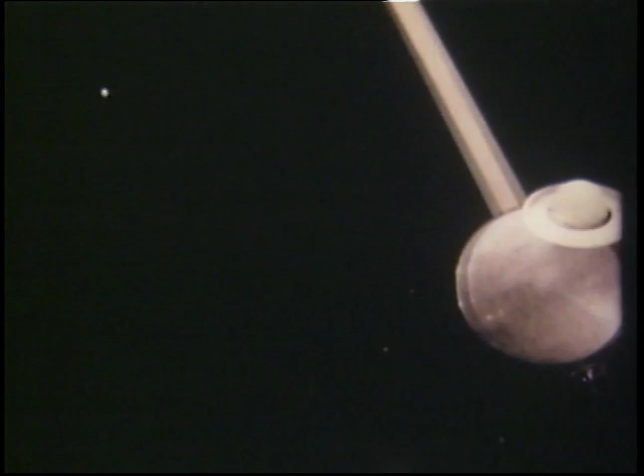Time, intangible, elusive time, measured in years by the broad movement of planets, measured in seconds by the inventions of man.

Seconds, tiny fragments of time, marching single file down through the ages, writing the pages of history as they pass in review. 60 seconds every minute, 3,600 seconds every hour,

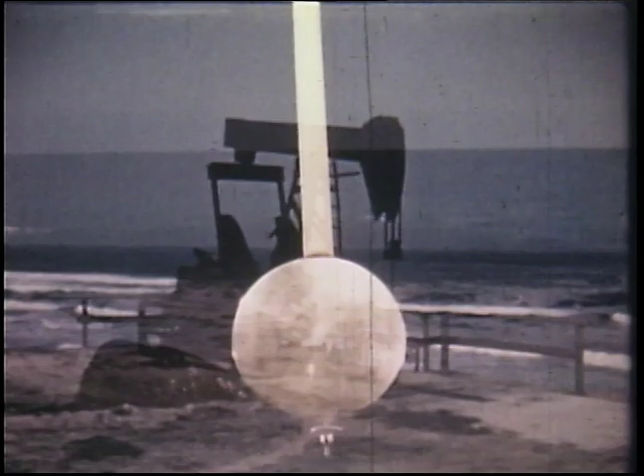86,400 seconds every day. And with the fleeting life of each and every second, more than 6,000 gallons of oil are brought up from the earth.

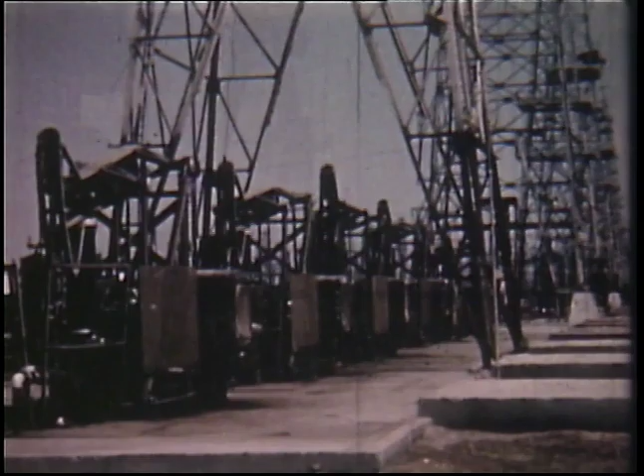Oil from the east, oil from the west, the north, and the south, oil from 30 states of the USA, and from 50 countries of the world. Oil coming from the earth in huge quantities to fill our increasing demand.

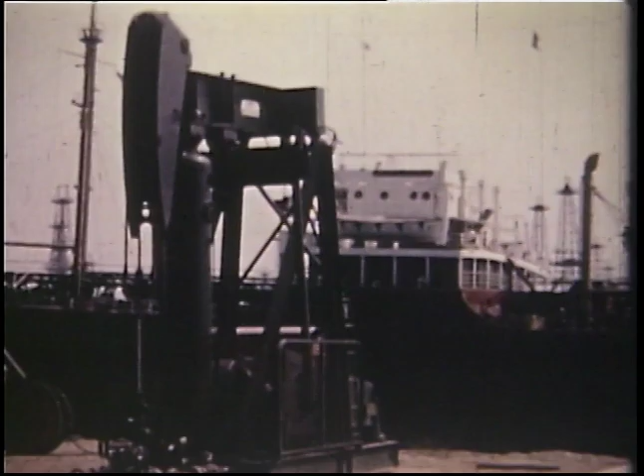In the United States alone, enough oil is produced daily to float a giant ocean vessel. And that's a job calling for a lot of manpower.

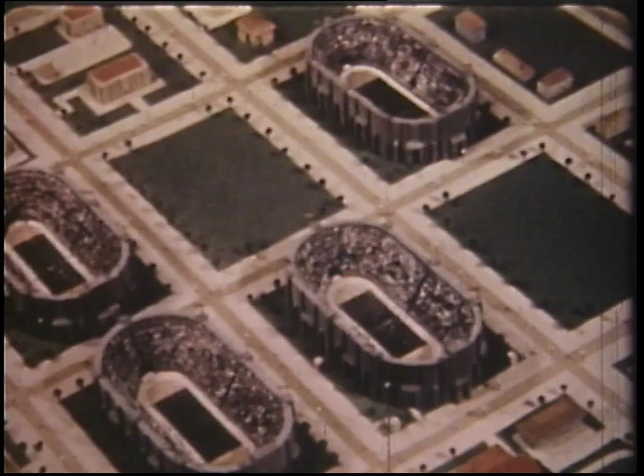For example, a famous football stadium seats over 100,000 persons. Yet 20 stadiums of this size can be filled to capacity by the number of persons steadily employed in the oil industry.

Many men, many jobs, and all because less than 100 years ago, someone had an idea. An idea that perhaps a man could find oil in huge quantities by boring a hole into the earth.

The idea of drilling specifically for oil was new, but the principle employed was an old one. Almost 3,000 years ago, the ancient Chinese had developed a laborious method of drilling for salt.

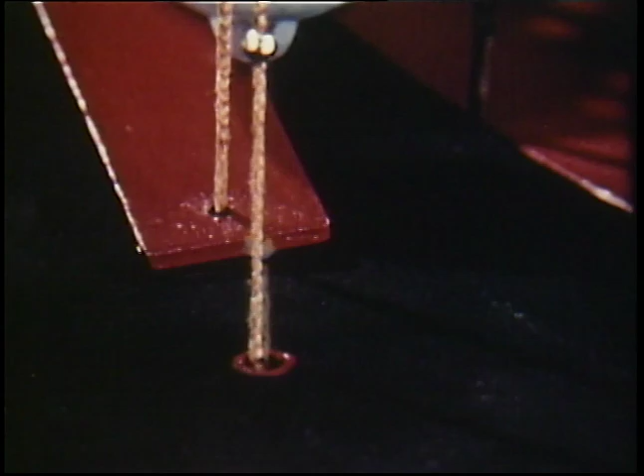The well drillers would jump on a springboard, something like a diving board. This would give slack to the rope supporting the drill tool, causing the tool to drop and pound into the earth.

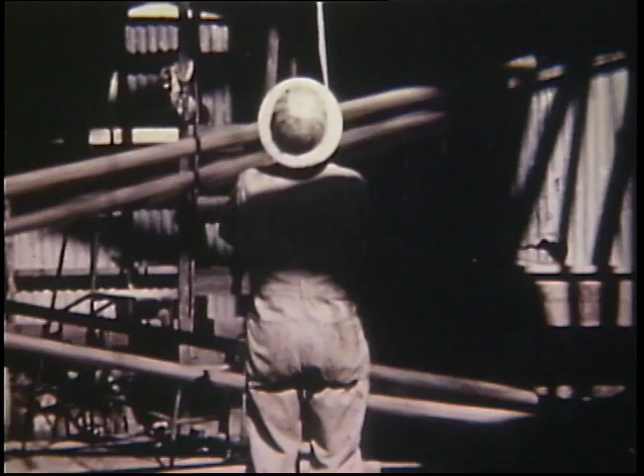Out of this principle evolved the early method of drilling for oil, cable tool drilling, in which a walking beam took over the job of lifting and dropping the drill tool to pound a hole.

Now, there are two common ways of forming a hole. One way is to pound or punch out a hole, as in cable tool drilling. The other way is to bore or scrape out a hole, and that's the idea behind modern rotary drilling.

Using rotary drilling methods, the search for oil has gone to almost unbelievable depth. The famed Empire State Building towers more than a quarter of a mile above the streets of New York. Yet its colossal height could be sunk into the depths of one of the world's deep oil wells.

And another such building, and another, and another, and yet another, until 15 Empire State Buildings have been sunk to approach the depths which have been reached by rotary drilling.

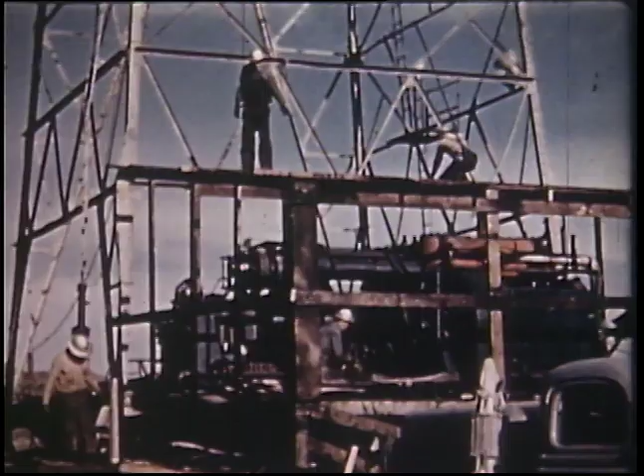Suppose we watch the big job of sinking a deep well by the rotary method. The work begins with the erection of the derrick and the installation of the rig.

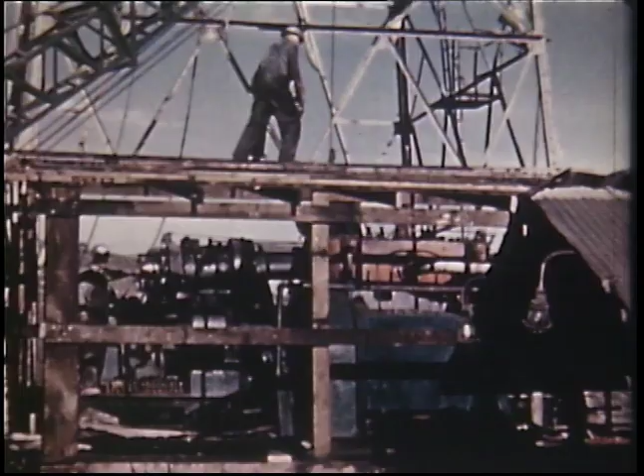This equipment may have cost up to $250,000, not to mention the $50,000 that may have been spent just getting into the well location. Before this exploratory well is completed, it may represent an investment of $1 million, and the chances of actually finding oil are about 1 in 9.

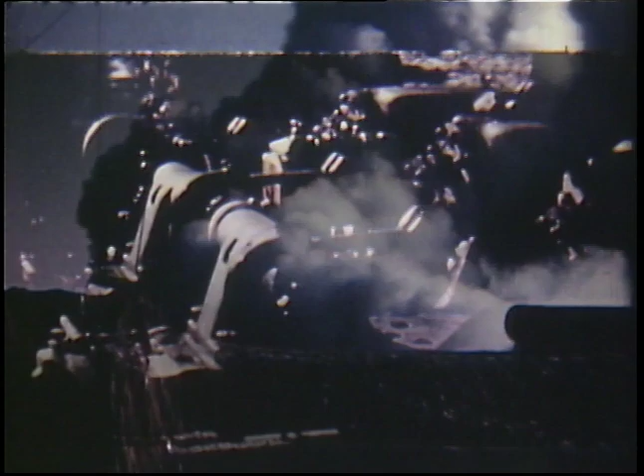With the derrick and rig installed, drilling operations get underway. We are making holes.

A heavy steel rotary table turns the drill string below ground. A square hollow pipe called the Kelly works off the rotary table and fitting through a square hole is free to move up or down.

Fitted to the Kelly is a length of drill pipe. More and more of these 30-foot sections are added as the well goes deeper. At the end of the drill pipe is a drill collar, and below this, the bit.

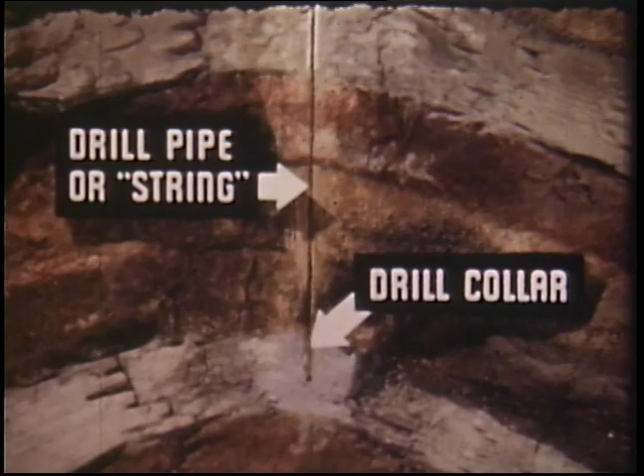There are more than 50 different types of bits. Here, a simple one is used to cut through the soft surface formation.

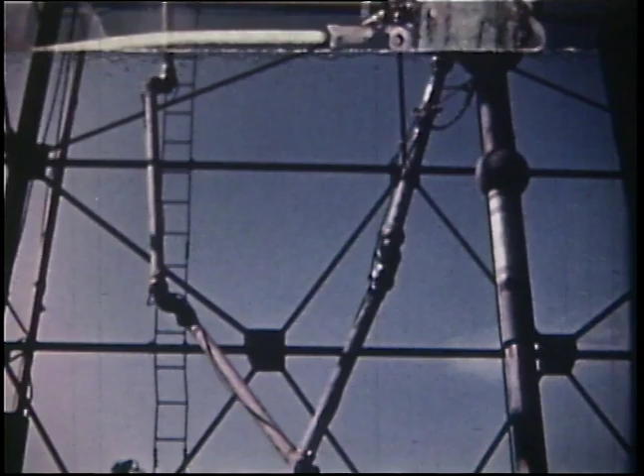Mud, scientifically treated mud, plays a highly important role in drilling operations. Circulated by a battery of powerful pumps, the mud is forced up into the swivel.

Surging down through the hollow pipe of the drill string, it jets out around the bit to perform vital cooling and lubricating action. Returning up outside the drill pipe, the mud seals the walls of the well. This helps maintain pressure and prevents the walls from caving in.

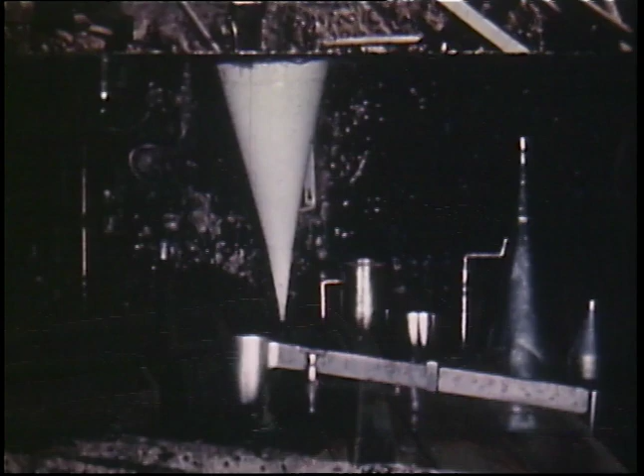In addition, the mud carries up the drill cuttings from the bottom of the well, providing important information about the strata which is being penetrated. This is mud with a college education. Special chemicals and weighting materials are added from time to time to maintain the formula in precise balance.

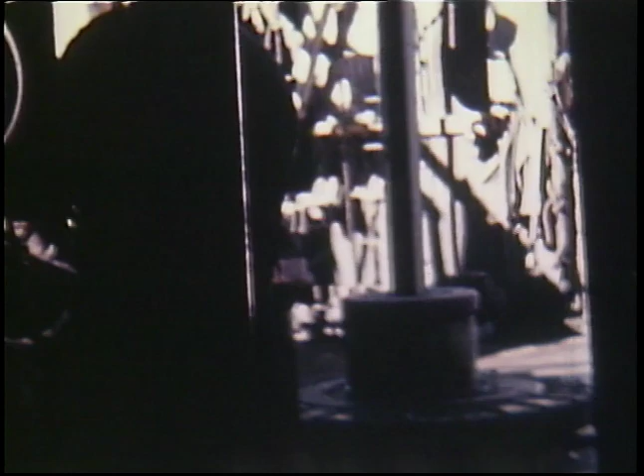As drilling progresses, various types of underground formations are encountered. Now we're getting into hard stuff. We'll have to exchange our bit for one designed to penetrate this harder formation. Let's pull her up.

This means pulling the string, a long job calling for precision teamwork between the members of the drilling crew and the ponderous equipment at their command.

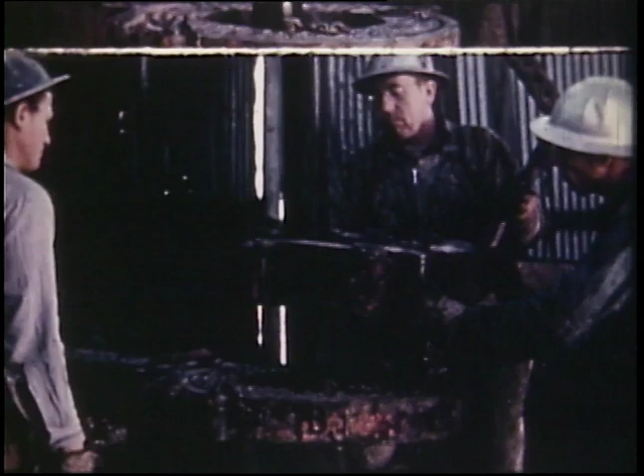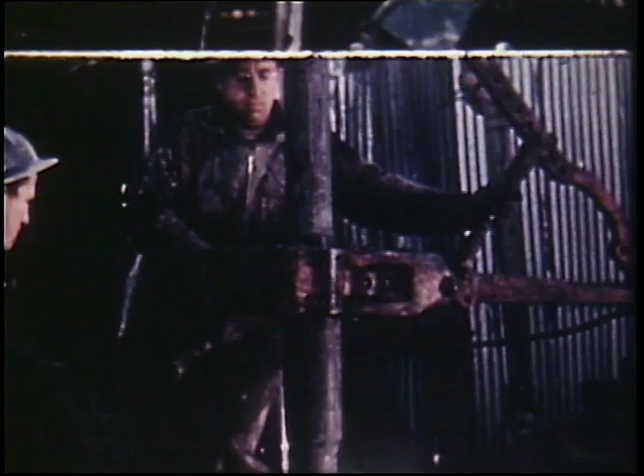Section by section, the huge pipe is hauled up, carefully disjointed and stacked. Five men working as one, handling tons of steel with a confidence born of long experience.

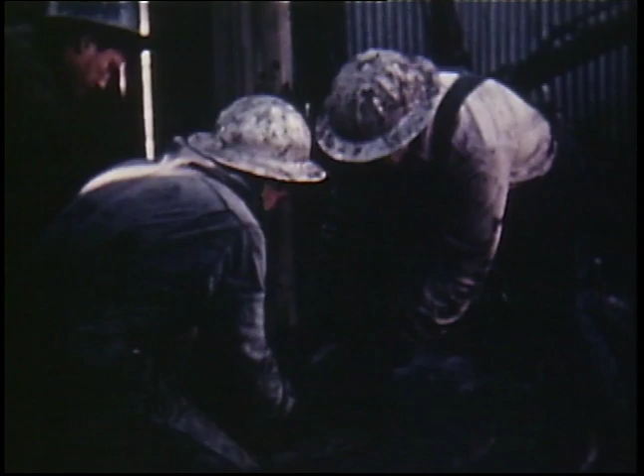And here's the new bit, designed for chewing through hard rock. This and many others will be worn out before the drilling is completed. After the new bit is in place, we'll have to recouple and lower the string again.

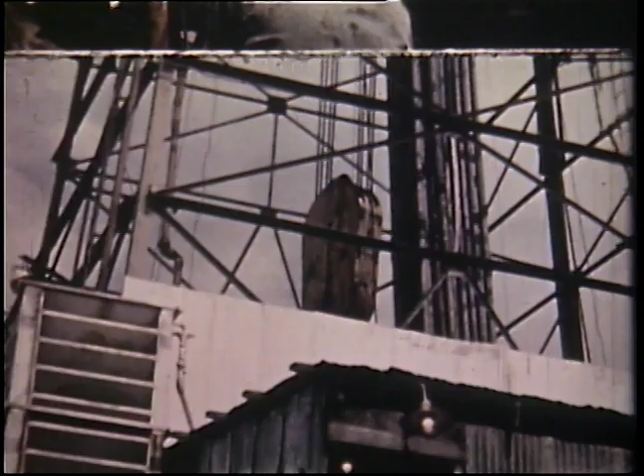With drilling underway once more, 3,000, 4,000, 5,000 feet down, the going gets tougher, slower. Hard rock and soft. Uh-oh, trouble.

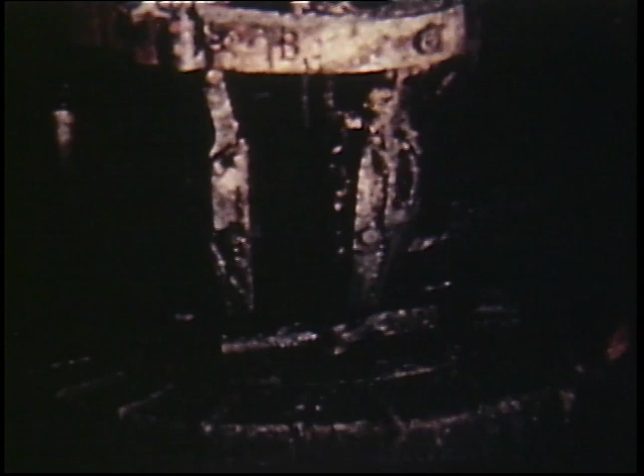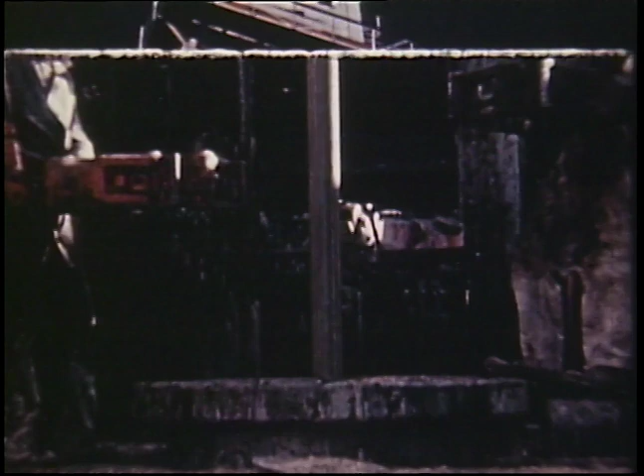Yes, real trouble. A broken drill string. We'll have to quit drilling for the time being and go fishing.

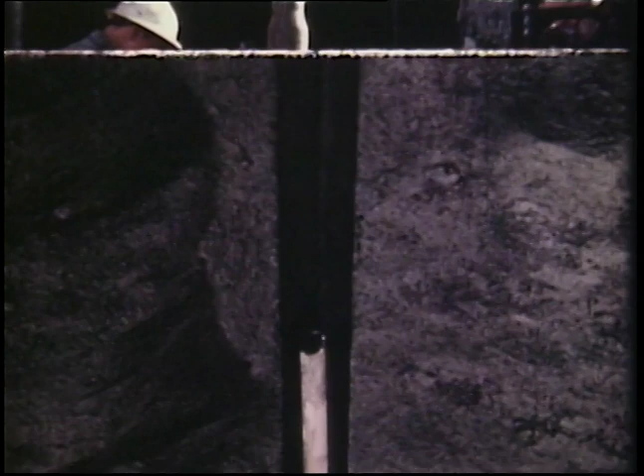An attempt must be made to bring up the twist-off, or fish, from its position thousands of feet below. And here's the fishing tackle, a socket designed to slip over the broken end of the drill string with dogs to clutch it. It is lowered into the well on the drill string.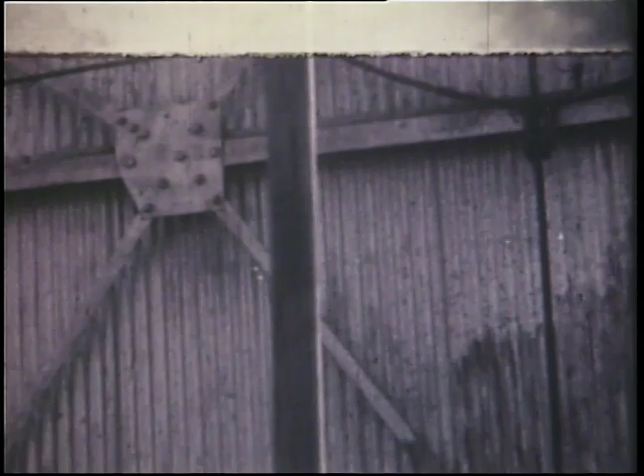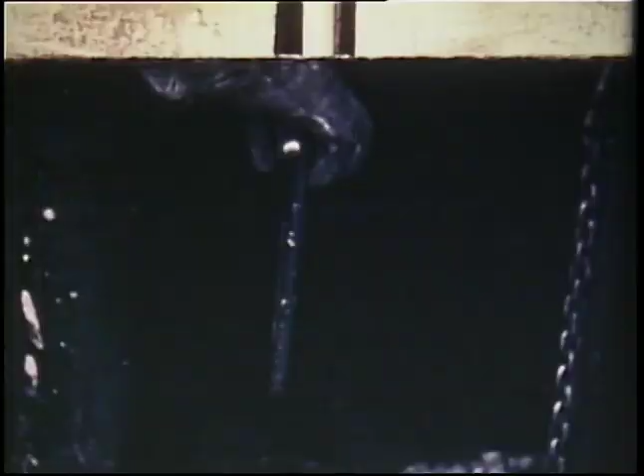The operation may take several days. Sometimes the fish refuses to be caught, even after every possible type of fishing tool has been used.

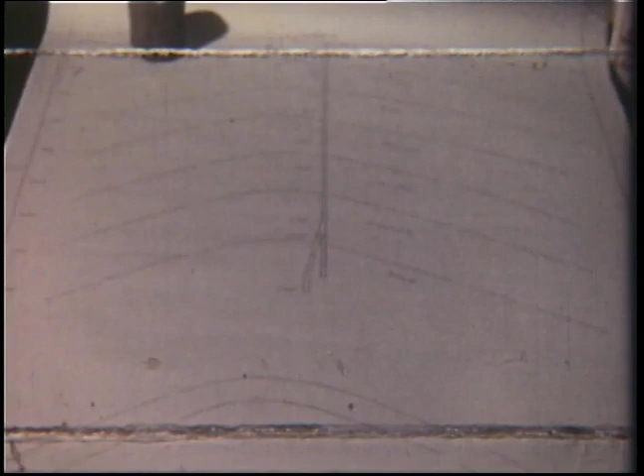With the fishing not making much headway, the engineers must decide whether to continue this costly operation, or to abandon the well, or to whipstock. The decision is whipstock. We'll try to go around the broken drill string by veering off from the straight hole.

Yes, now we're doing exactly that by directional drilling. With a whipstock, a beveled piece of steel shaped to deflect our bit over at the precise angle desired, we are accomplishing the seemingly impossible feat of drilling a curved hole.

We have angled our well over to bypass the broken string. And again, the drilling is continued, but now more cautiously than ever.

We're down past the 10,000-foot mark and nearing the spot that our scientists tell us should be productive formation. Rate of penetration has increased. Soft formation and maybe, well, we've got to get a sample of what we're hitting down there.

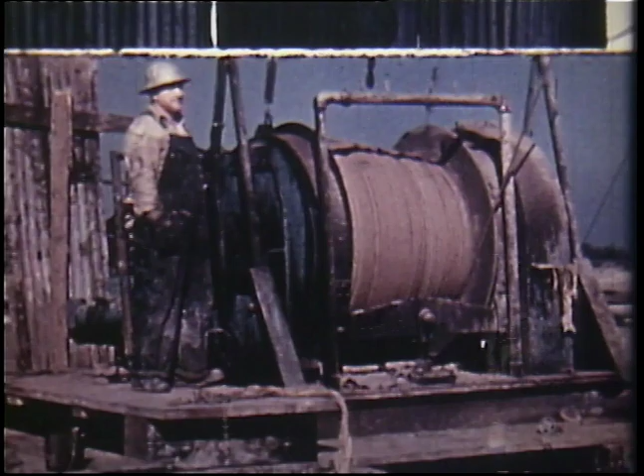A special core-taking barrel is lowered into the drill string by means of a cable and windlass. The core barrel, held firmly within the drill collar, works like Grandma's cookie cutter. It slices out the desired core sample, which is retained within the barrel and hauled back to the surface on the cable.

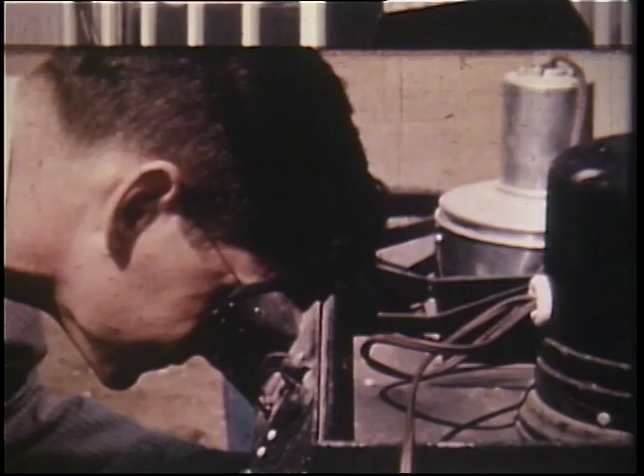A careful analysis proves our core to be essentially water-bearing, despite minor oil stains. Not good enough for production. Disappointing, but maybe a little farther down.

Another 300, 400 feet, and again, the speed of penetration picks up. This time, we'll use electric logging to see what we're getting into.

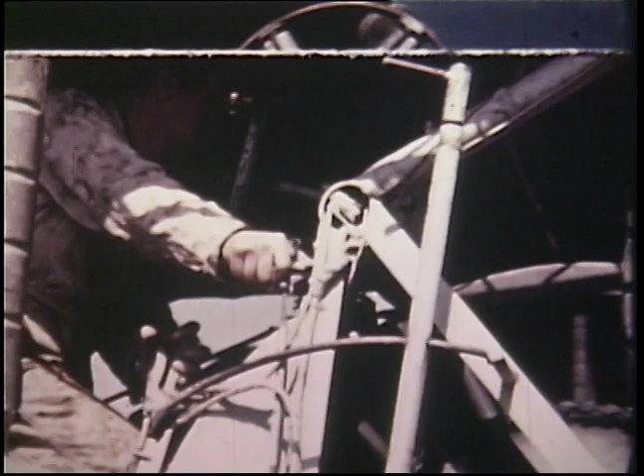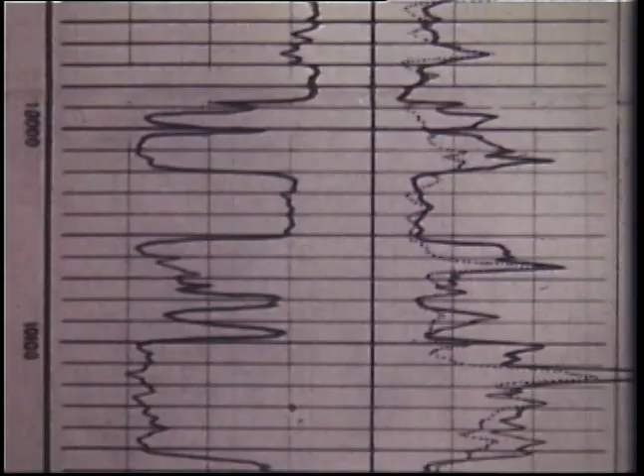This device consists of a group of electrical instruments which enable us to get an indication of the physical character and fluid content of the formation we have penetrated. The reading looks favorable. We'll case the formation off.

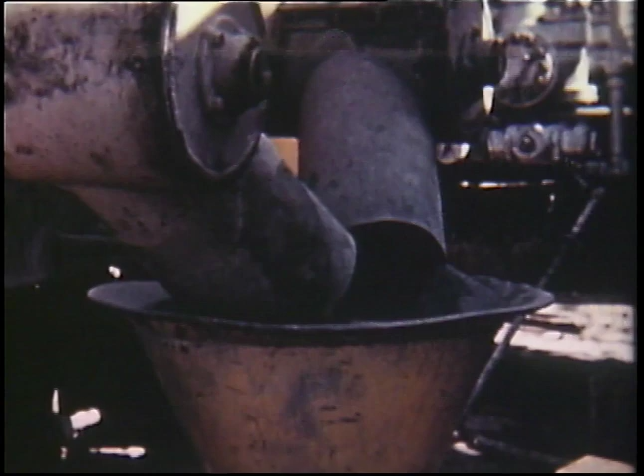A cementing outfit is called in. The cement is mixed on the spot and pumped to a special connection at the top of the casing. Forced down with mud, the cement rises between the casing and the wall of the well. The cement is allowed to harden.

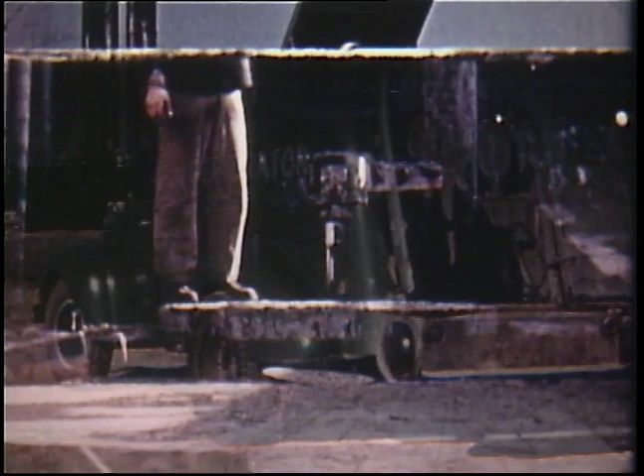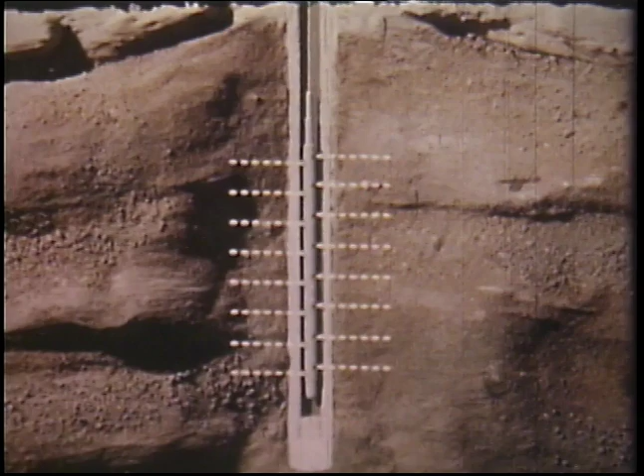And now we are ready to cut loose the heavy artillery. A gun perforator is lowered into the well. The device is fired. Heavy caliber bullets pierce the steel casing and cement to let in the oil.

Now tubing has been run into the well, and if she's going to produce, it'll come through that tubing. A Christmas tree has been added to control the expected flow.

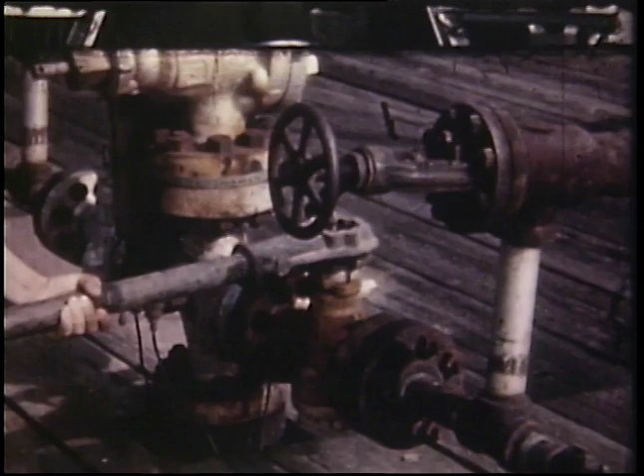Oil or water is forced through the tubing to flush out the mud. Only about 1 out of 9 exploratory wells is productive. A few tense seconds, and we'll know about the one we've been working on for so many weeks. It's now or never.

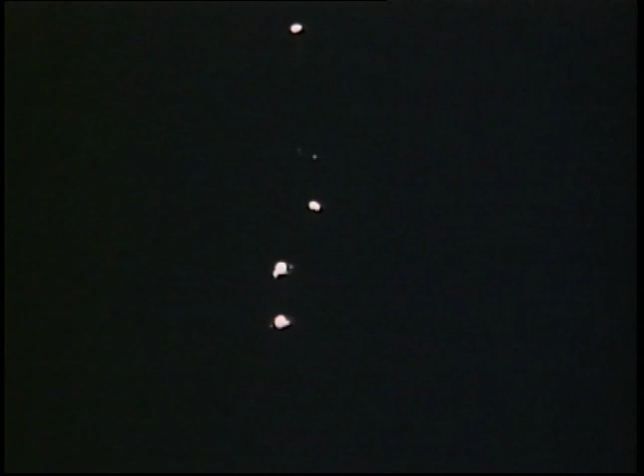Yes, it's the birth of an oil field. One more victory in the ceaseless night and day job of searching, drilling, bringing up from the earth new supplies of petroleum to fill the increasing demands of modern living.

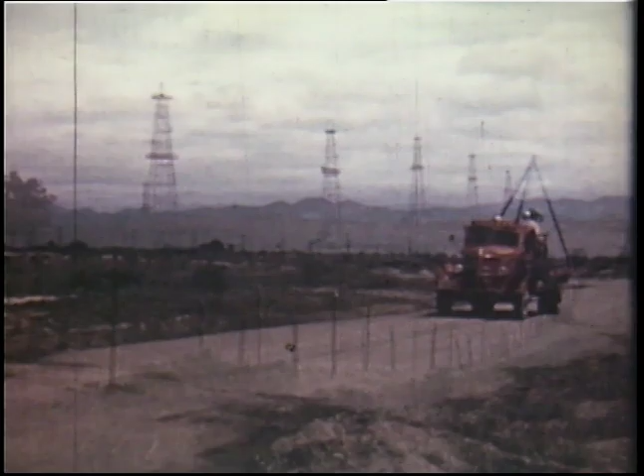We drilled a well and found some oil. Now begins the many-sided job of production, getting the oil out of the ground and into the refineries. To produce oil efficiently from this area, additional well locations must be scientifically plotted and drilled in. Roads must be built, equipment installed, oil storage and treatment facilities erected, pipelines laid - 1,001 tasks performed by men of almost every sort of skill and training.

Perhaps you'd like to meet one of these oil men, a production engineer. His job is conservation, getting the last possible oil from nature's reservoir and getting it efficiently.

Pardon me, Mr. Benson. Mind if we ask you a question? Why, certainly not, but keep it simple, will you? Well, this should be easy for you. When you drill in a well, what makes the oil flow to the surface?

Well, actually, some new wells never do flow. However, when an oil well does flow unaided, it's usually because of gas pressure, water pressure, or a combination of both. Take a look at that model, for instance.

That's a simple anticlinal structure, an oil trap. The oil-bearing stratum is sandwiched between layers of impervious rock, which prevent the oil from escaping. Oil deposits occur in the pores of rock, not in underground pools or lakes.

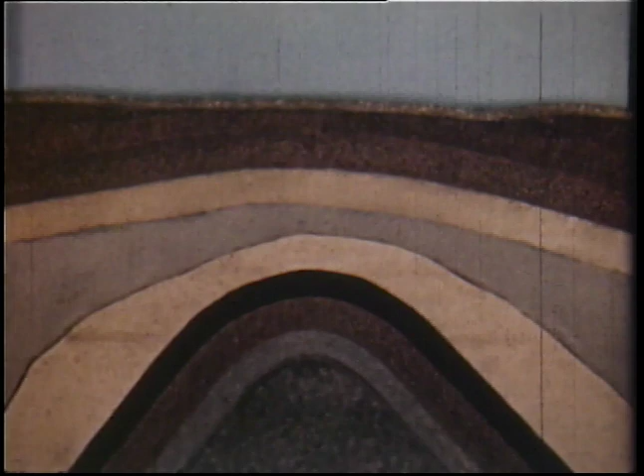Usually there is water found in connection with oil deposits. Since oil is lighter than water, the two will be separated, the oil occurring above the water. Where there is oil, there is gas. Gas will always be found dissolved in the oil, and in some cases, additional gas will occur in a free state above the oil. So much for setting the stage.

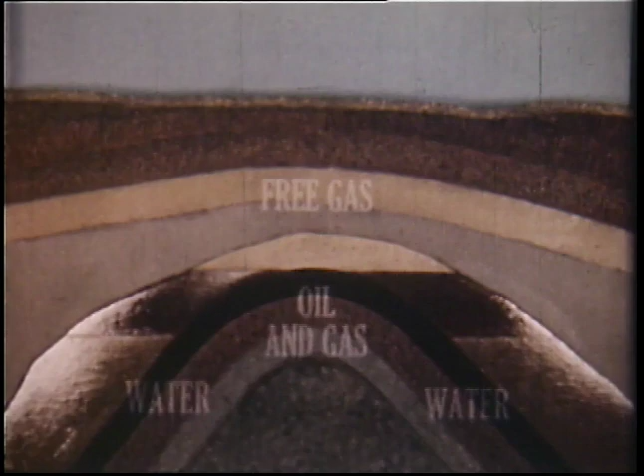Now, suppose we sink a well and tap the oil sands. If the well flows, it means that some form of natural energy is working for us. Otherwise, we'd have to pump, right? Right. Okay. Now, in a flowing well, the main source of energy that lifts the oil is, in most cases, expanding gas.

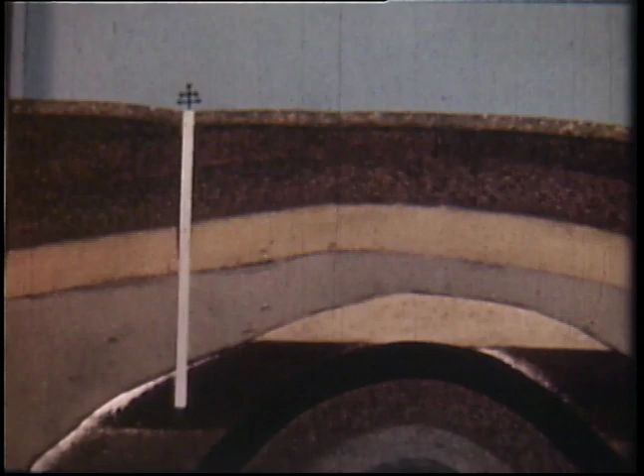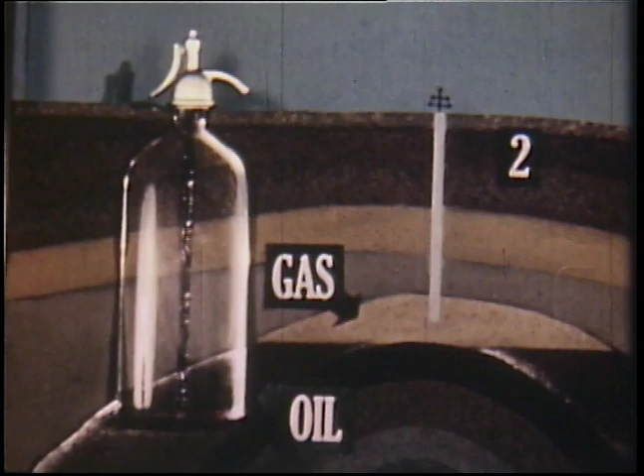Now, suppose we sink another well in a different location. Unfortunately, we've missed the oil zone. Well number 2 is like the shortened tube in the siphon bottle. It can produce only gas. Hence, we would leave it shut in. We want to conserve the gas energy for driving the oil up well number 1.

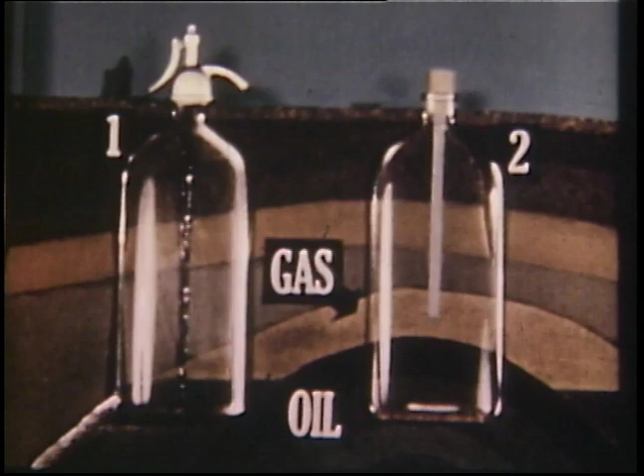As we continue to produce oil and gas from the well, the free gas has more room to expand. As a result, the gas pressure gradually declines. The well may flow for months or even years, but the decline in gas pressure is inevitable. Eventually, a point is reached where there is no longer sufficient pressure to force the oil to the surface. In this case, the well will have to be pumped.

Now, we've been talking mainly about lifting oil to the surface. But remember, the oil must also be moved from various parts of the formation into the well. While gas plays an important part in bringing oil into the well, there is another force which in many fields is equally or more effective in this work.

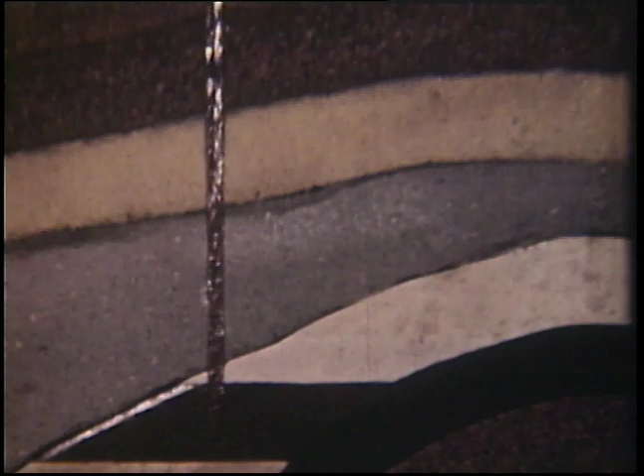The driving force of encroaching water. This water exerts pressure from below, and as oil is produced at the surface, the incoming water replaces it.

In time, however, the natural forces exerted by water or gas or both may become too weak to move the oil into the well at a sufficient rate. Well, what do you do then? Well, there are several methods of recovering a portion of the oil remaining in the formation.

They involve what we call repressuring. In one method, enormous quantities of gas are pumped back into the formation. In this way, part of the original gas pressure can sometimes be restored, causing the wells to produce at a higher rate. In another method, large volumes of water are pumped into certain wells.

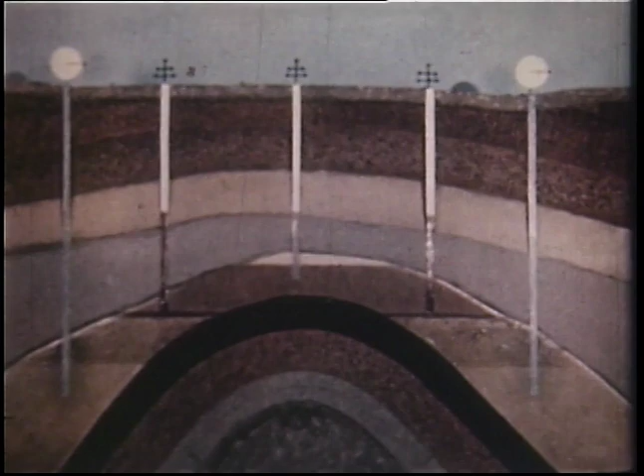This creates an artificial water drive, forcing the oil to the other wells. Well, I can see that there's more to this oil business than appears on the surface. Oh, you're right about that.

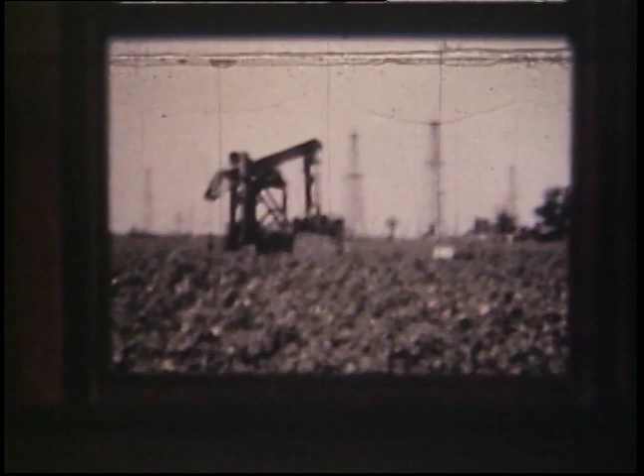Now, let's step over here for a minute and take a look out the window. There's a modern oil-producing field for you. The derricks have all been removed, farm crops growing nearby, and no sign of the wells except for a neat little Christmas tree. The Christmas tree is simply a group of valves and pressure gauges used to control the flow of oil and gas from the well.

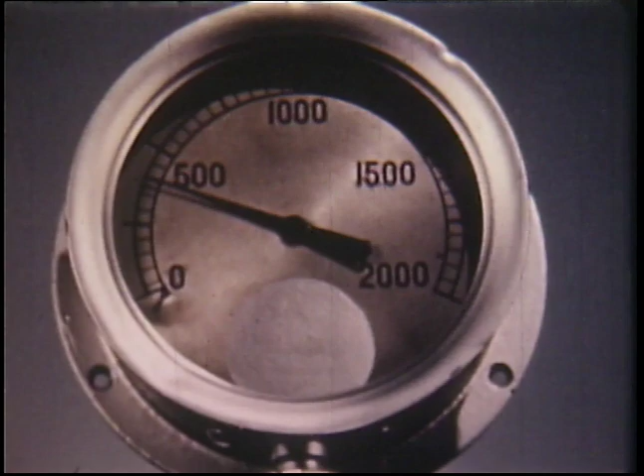We try to conserve the natural gas pressures as long as possible by producing the most oil with the least amount of gas. Of course, day by day, the gas pressure declines, and eventually there won't be enough pressure to force the oil to the surface. What do you do then? The well must be pumped.

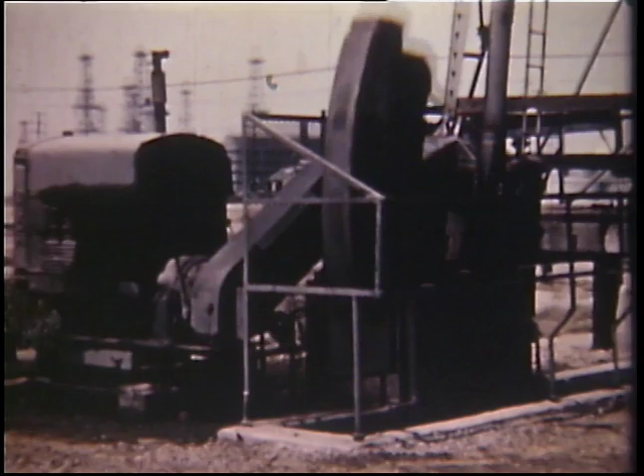There are many different types of oil pumps, but they all work on much the same principle, like Grandma's old-fashioned cistern pump. Only Grandma had to use elbow grease to get the water out. Modern oil well pumps are usually driven by power plants which use natural gas from the fields or electricity.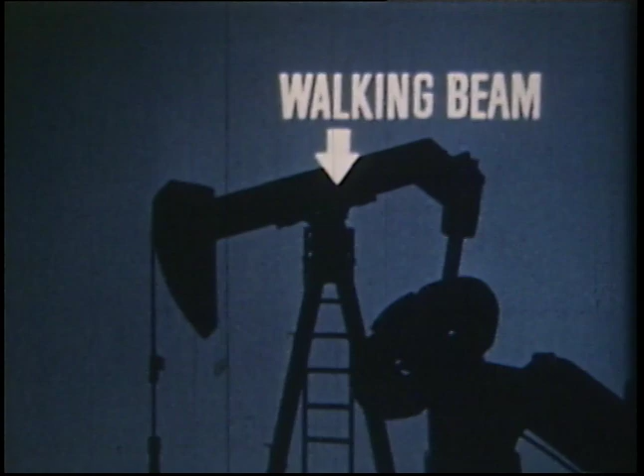The power plant actuates a walking beam, which in turn imparts an up and down movement to a string of sucker rods. The sucker rods are connected to the pump at the bottom of the well. Simple valves open and close with the motion of the pump, raising the oil to the surface.

Boy, certainly takes a lot of equipment to produce oil. Yes, and actually, you've seen only a small part of it. Well, what else can I do for you? Got time to answer one more question? Why, surely, what is it? What do you do with the oil after you bring it to the surface?

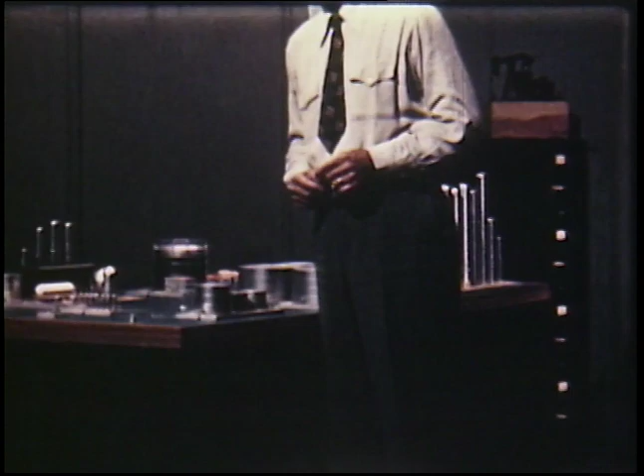In a word, we move it into the refineries. Here, take a look at this model setup. I think it'll help answer the question. This layout represents the whole business of oil production in a nutshell.

Generally, the product of an oil well is a mixture of oil, gas, and water. This mixture flows first to a gas trap, which separates the so-called wet gas from the oil and water. Leaving the oil for a moment, let's follow the wet gas to an absorption plant.

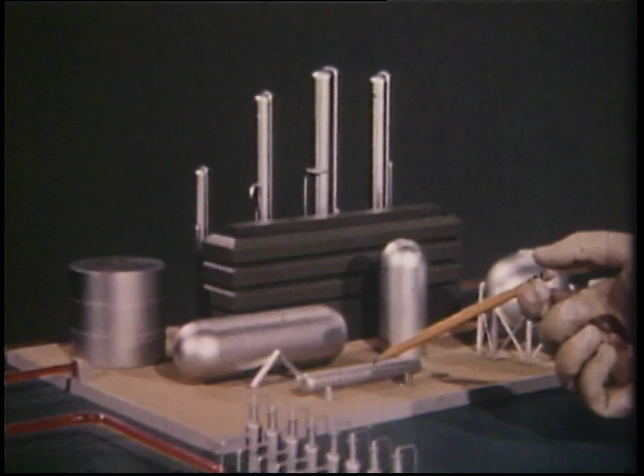Here, the wet gas is literally dried by extracting liquid products such as natural gasoline, propane, butane, and isobutane. From the absorption plant, the dry gas goes to public utility companies, who in turn supply it to homes and industries for heat, power, and manufacturing processes.

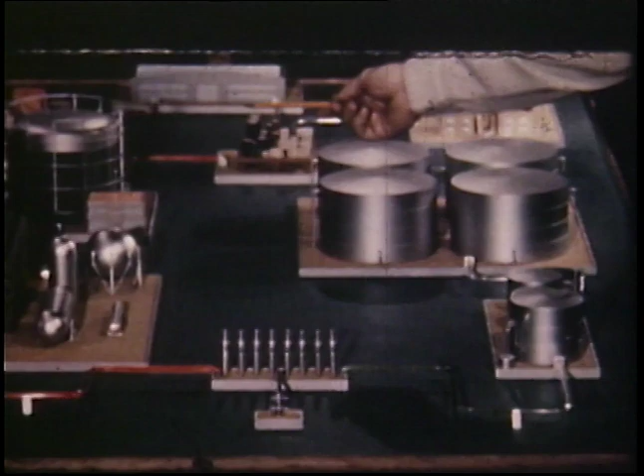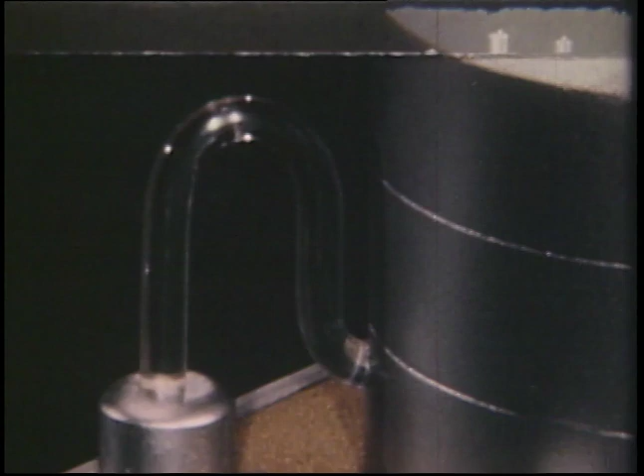So much for the gas. Now let's go back to the gas separator and see what happens to the oil. After the wet gas has been removed, the oil usually flows to a dehydration plant or settling tank, which serves to remove water from the oil. The treatment and disposal of this unwelcome water is quite a story in itself.

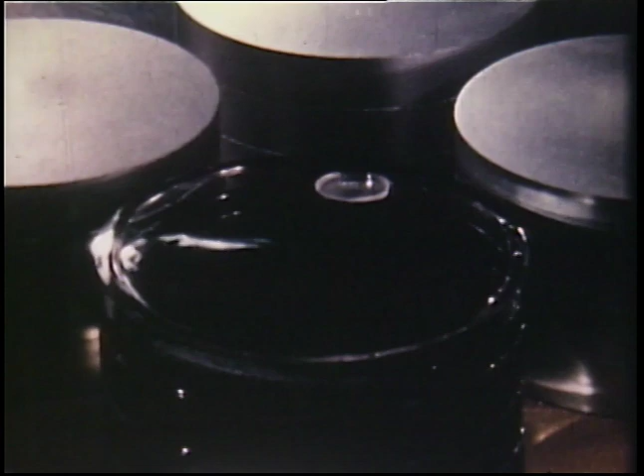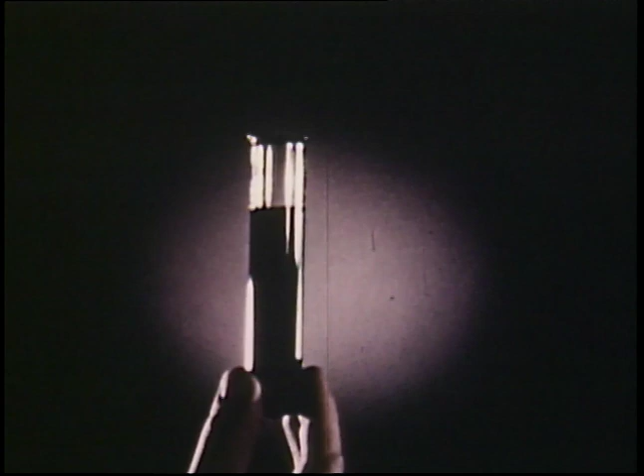But let's follow the clean oil now to the field tanks. When these tanks are full, the quantity of oil in the tank is measured or gauged. At the same time, samples of the oil are taken from the tanks and sent to a laboratory, where tests are made to determine the quality and value of the oil.

From the field tanks, the gauged and tested oil moves to a pumping station, where it is boosted along on the last stage of its journey to the refineries. And that's where our job of production ends, and the complex job of refining the crude oil into marketable products begins.

Many men, many jobs, and all because someone had an idea. An idea that expanded into a major industry, transforming vast areas of worthless land into gainful property, benefiting thousands of private landowners through the monthly payment of royalties, giving birth and sustenance to hundreds of clean, orderly communities around oil-producing and refining centers, and developing a multitude of products which contribute so much to man's comfort in terms of heat, power, freedom of movement, and physical well-being.

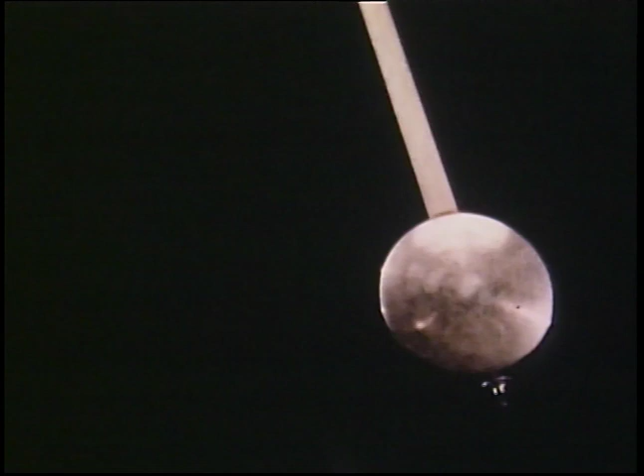Only time and continuing research on the part of the petroleum industry will reveal what added comforts may be developed for the generations of today and the generations of the days to come.